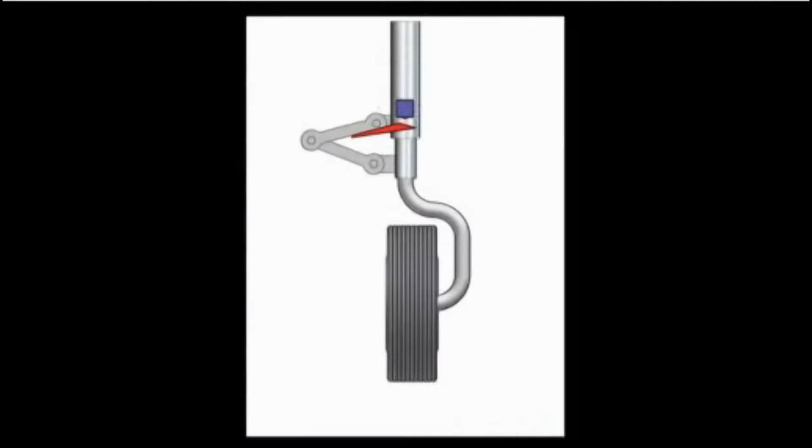Let's start with normal braking. Both pilot brake pedals are mechanically interconnected and apply hydraulic pressure from number 1 system through a brake control valve to the inboard and outboard wheels of both main gear. When the brakes are released, return pressure through the brake control valve releases pressure on the wheels.

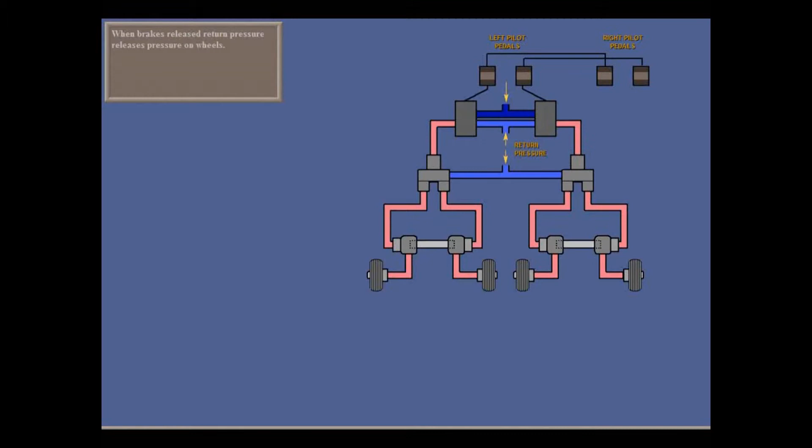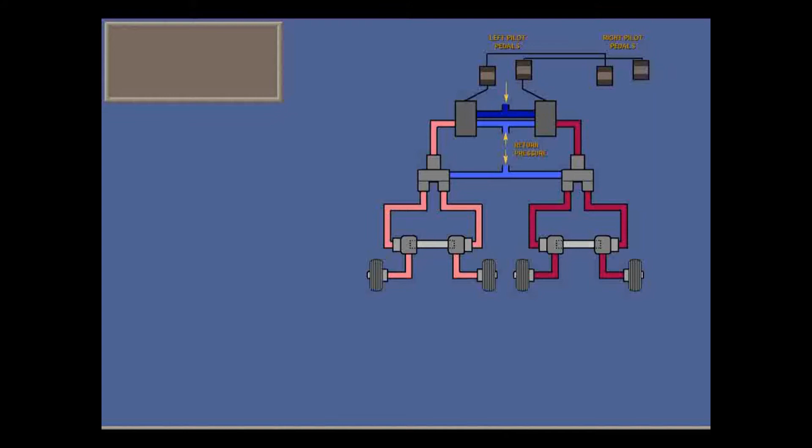The right pilot pedals move the left pilot pedals, but the opposite is not true. Braking with the left pilot pedals does not move the right pilot pedals. Note that each pilot's left and right pedals are independent. The left pedal slows the left main gear, and the right pedal slows the right main gear. So differential braking can be used to steer the aircraft.

With the anti-skid switch on, speed sensors on each wheel send signals to an anti-skid control unit. The PSEU also provides weight on wheels input to the control unit. Brake pressure to the brake unit on each wheel is applied through anti-skid valves and through shuttle valves.

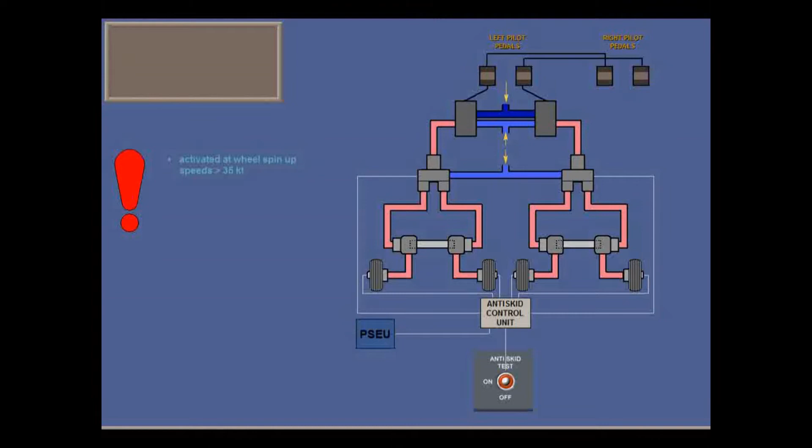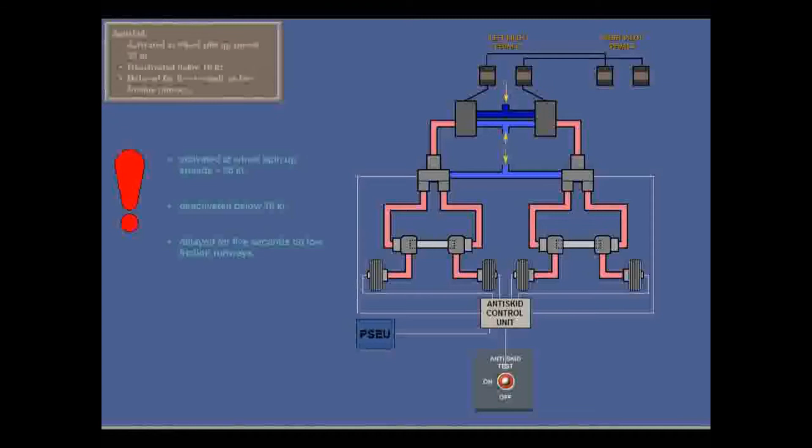Anti-skid is activated at wheel spin-up speeds over 35 knots and deactivated below 10 knots. For low-friction runways, when wheel spin-up is too slow, the anti-skid system delays braking for 5 seconds to minimize the chance of skidding. The system performs a self-test when switched on with the gear down and locked.

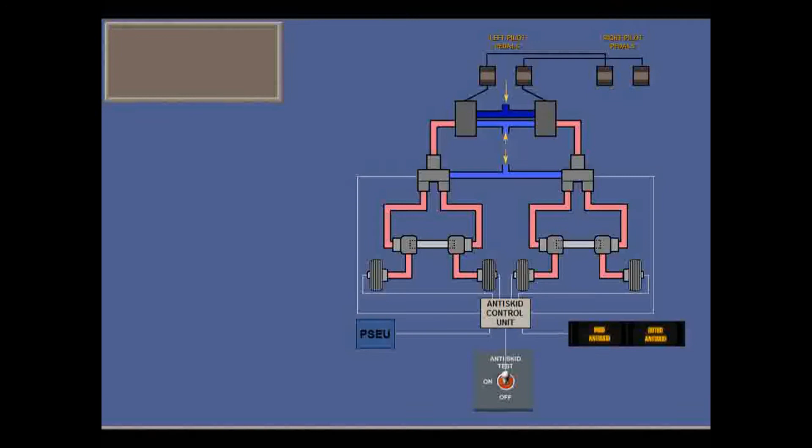During the self-test, the inboard and outboard anti-skid caution lights will illuminate. It can also be tested with the test position. Touch the switch to move it to the test position. In the test position, the anti-skid caution lights go on for 3 seconds in flight or 6 seconds on ground, then go off if the system is OK.

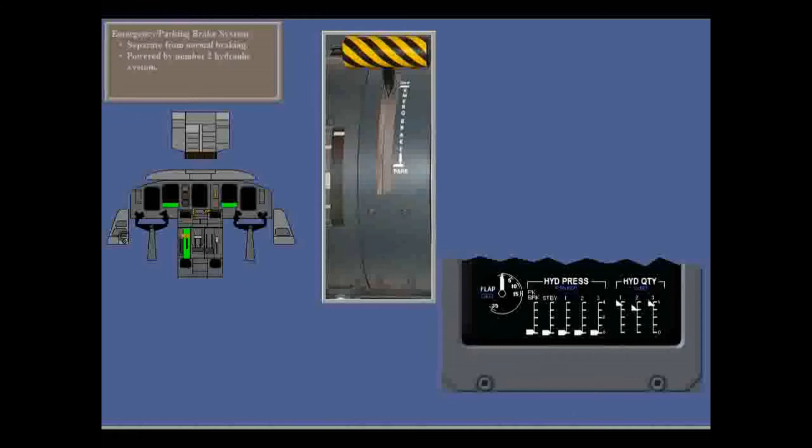The emergency and parking brake system is entirely separate from normal braking. It is powered from number 2 hydraulic system and has its own controls and indicators. It's operated from the parking brake lever with 3 settings: off, the emergency braking range, and the park position. It has its own pressure gauge on the hydraulic part of the right pilot MFD, reading 0 to 4000 psi, and a caution light that illuminates when the parking brake is engaged.

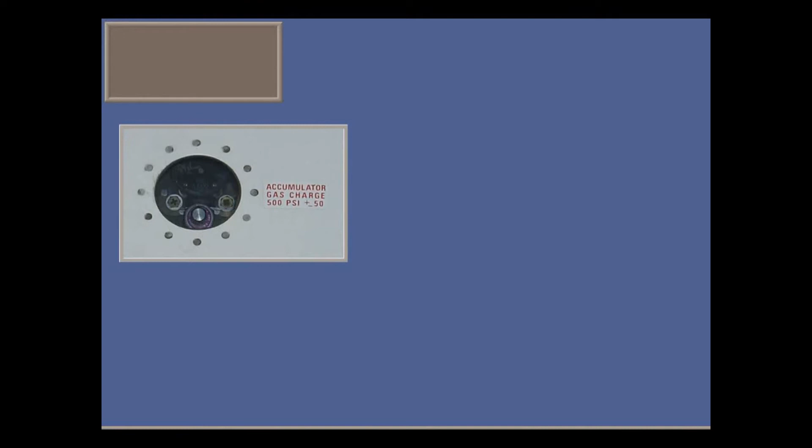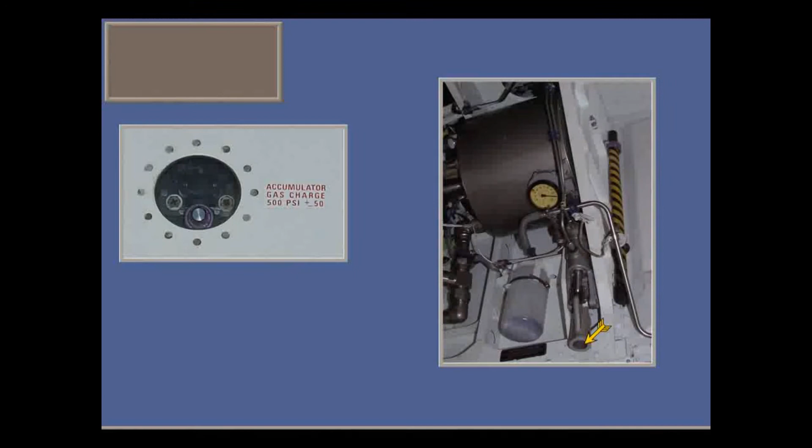If normal braking fails, and number 2 hydraulic system fails, the emergency braking still has its own accumulator in the right wing root. Normally charged by number 2 hydraulic pressure, it can also be charged on ground by its own hand pump in nacelle number 2 if pressure is too low before starting engines. When fully charged, it has sufficient pressure for emergency braking or for about 6 parking brake applications.

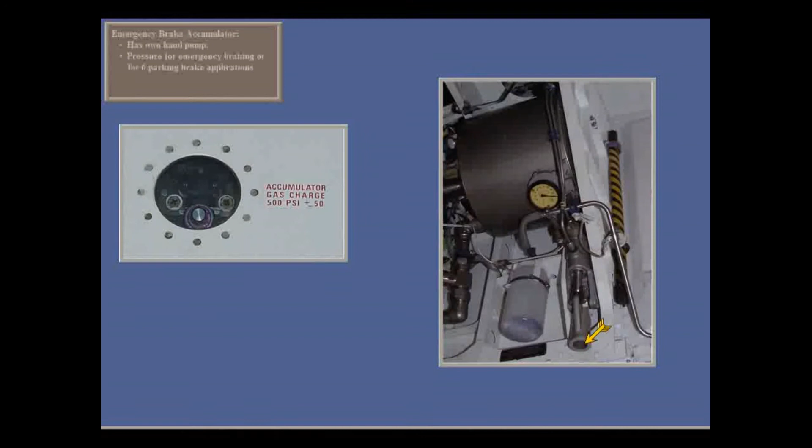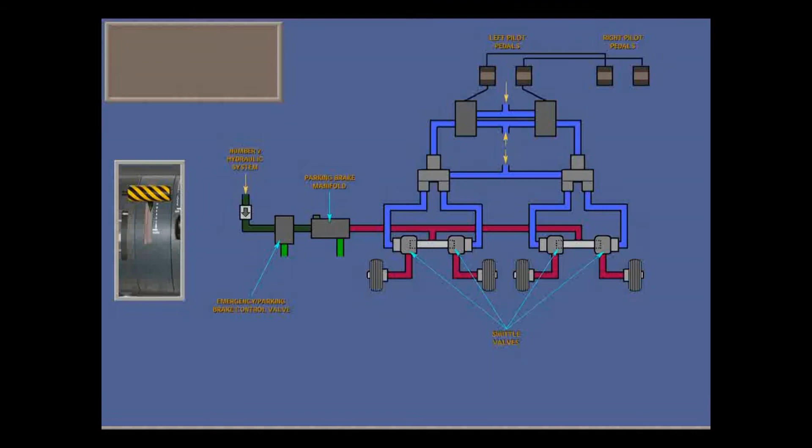The emergency system feeds into the main system at the shuttle valves, so it uses the same brake units. Moving the emergency brake lever signals the emergency and parking brake control valve and applies hydraulic pressure in proportion to its movement through the manifold, then through the shuttle valves to all brake control units.

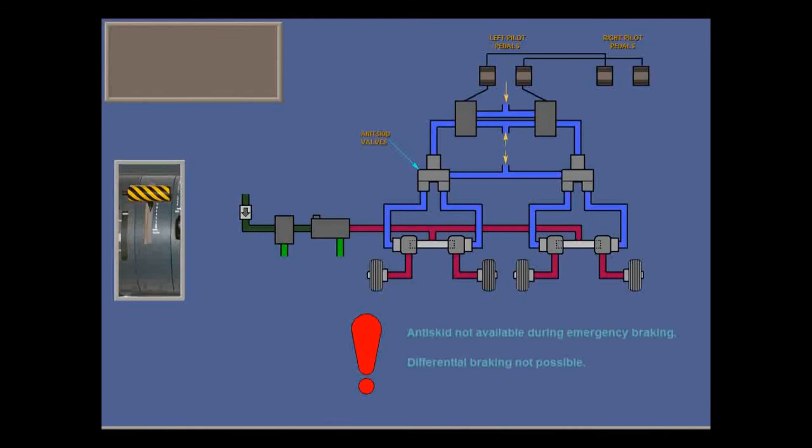Emergency hydraulic pressure joins downstream of the anti-skid control valves, so anti-skid is not available during emergency braking. And because emergency braking is applied equally to all wheels, differential braking is also not possible.

If hydraulic system number 2 is not available, then the emergency brake accumulator links in here and is charged on ground by a hand pump here. Don't confuse this with the alternate extension hand pump.

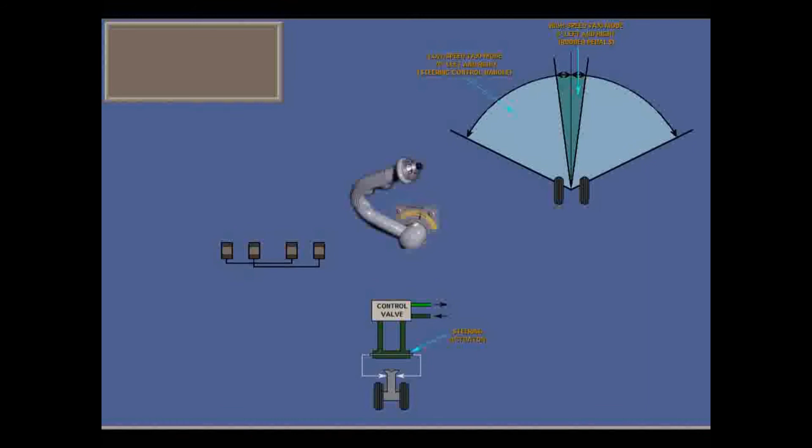Nose wheel steering is supplied from number 2 hydraulic system and controlled from the rudder pedals for high-speed taxi, takeoff and landing, or the steering handle for low-speed taxi. Both high-speed and low-speed steering are controlled through a nose wheel steering control unit, SCU.

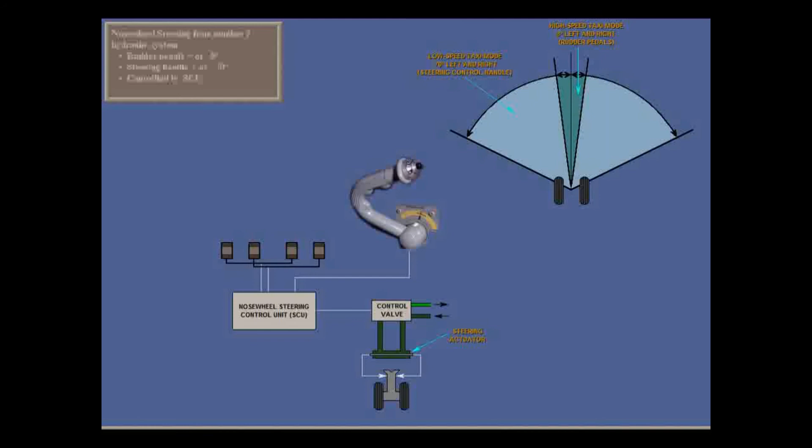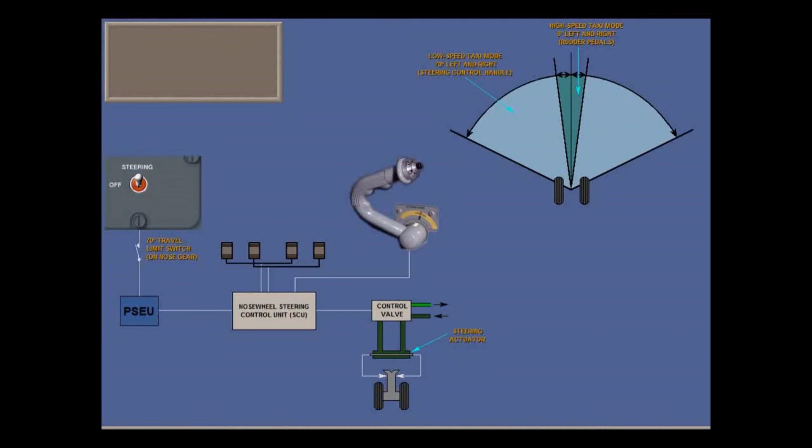The SCU is activated for nose wheel steering when this left panel switch is in the steering position and the PSEU gives on-ground signals. A switch deactivates the normal steering mode, releasing hydraulic pressure if the nose wheel exceeds 70 degrees. The nose wheel steering moves into a free caster mode limited to plus or minus 120 degrees.

Problems with the SCU trigger the nose steering caution light. The light also illuminates if the nose wheel steering exceeds 70 degrees. Hydraulic pressure is released and the steering moves into free caster mode.